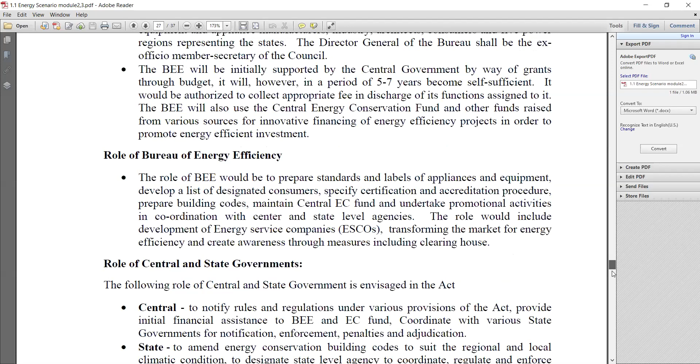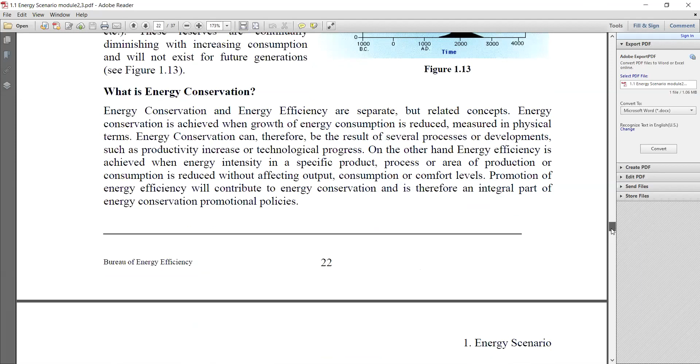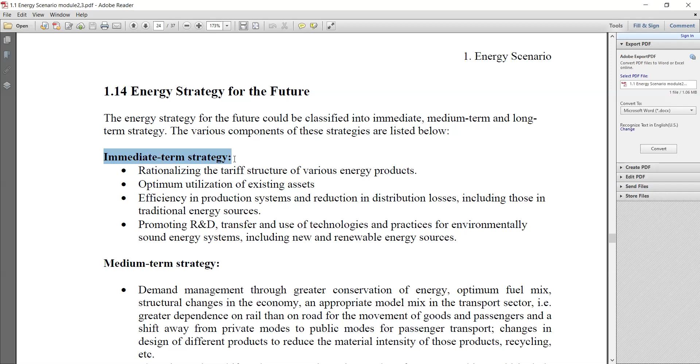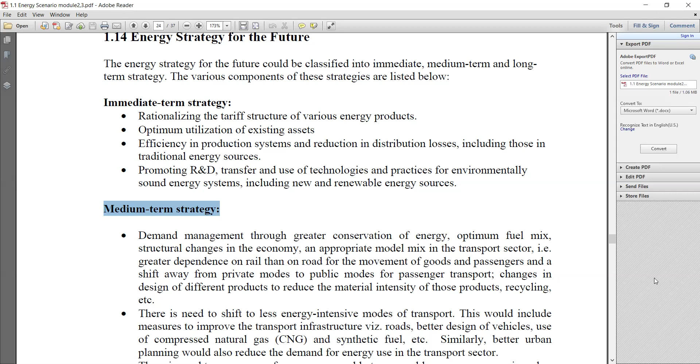In the last class we started with energy strategy for the future. We had looked at immediate term strategy - how quickly one can deal with the shortcomings in the tariff structure for energy and other aspects associated with it. What can be the immediate term effects and how can you go through them? Then we went on to medium term solutions - what can be the medium term strategy to handle energy for the future. Then the point left out was long term strategy - what should be the long-term strategy in terms of dealing with energy strategy for the future.

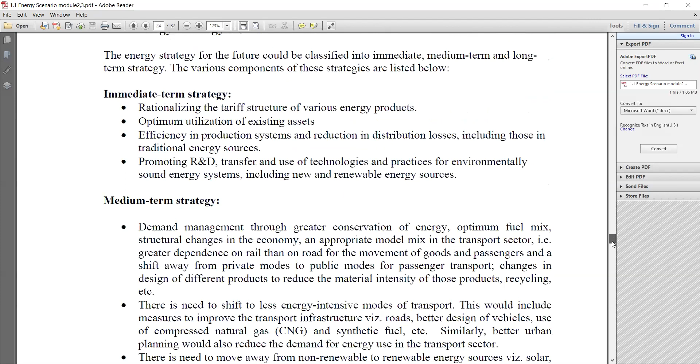So first is efficient generation of energy resources. Whatever energy resources are there, efficient generation of power should happen from them, that is, efficiency should be very high. Efficiency should be very high means whatever is the amount of input you're giving, equivalent amount of output you can get. That is, if 100% of input you're burning, and if you get 100% output power, that is the ideal efficient way of generation of energy resources.

But that is not feasible or practical in real life scenario. The strategy should be to maximize the efficiency as much as possible.

So for that, efficient production of coal, oil, and natural gas should take place. That means wherever quality coal, quality oil, quality natural gas is available, produce from there - extract it, refine it, then use it for energy generation, and the process should also be very much efficient.

These inputs - coal, oil, natural gas - should be used in such a way that the ash content, hydrocarbon content, sulfur content, nitrogen content should be eliminated, or available only in minimum quantity, though it is very difficult to get such kind of resources. So while utilizing these inputs, try to minimize the emission of hydrocarbons, volatile organic compounds, sulfur oxides, nitrogen oxides in order to produce energy generation. Then automatically your efficiency will be high, and your pollution will also be under very much control.

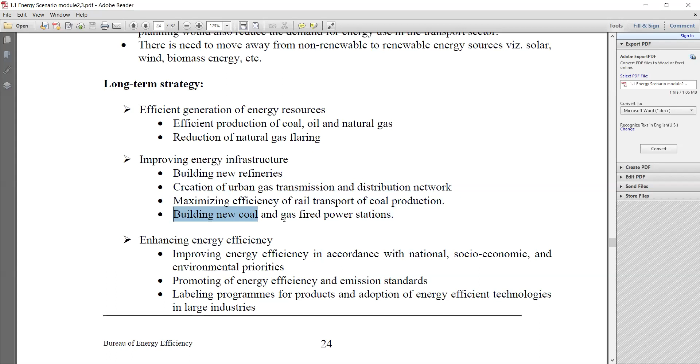Building new coal and gas fired power stations - trying to build up more and more power stations so that overall generation becomes higher. That has already taken place in India. Then enhancing energy efficiency - most of these things have already taken place.

Transportation cost is still there. It's pretty high, the transportation cost of coal from one place to another place. But there are many social, political, and international aspects associated with it. So it's easily said, but not easily done.

Then enhancing energy efficiency - again those same things, improving energy efficiency in accordance with national socio-economic and environmental priorities. That is, you've got to improve the efficiency of energy by taking into consideration your national aspect - what is the current national scenario, and what socio-economic things are associated with environmental priorities.

The same thing again - promoting energy efficiency and emission standards, that is creating more and more awareness among people about the importance of energy efficiency and reduction of emission of air pollutants.

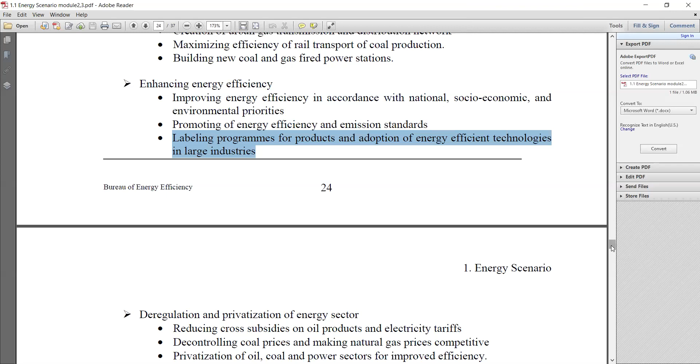So labeling means basically putting up any kind of tag on the device - tag means not price tag, but rating tag. For example, there is a 3-phase induction motor, so there is a nameplate rating always provided on it. So that is also labeling - you are putting a nameplate on the induction motor, and that nameplate carries the rating of the motor, so that will be easily visible. If you do not put any kind of labels on devices, then if any kind of maintenance, repair, or service is required, and there are several other devices, you won't have any idea about how to handle them.

So deregulation and privatization of the energy sector - this we have discussed already. Previously it used to be a one-man one-policy system, but later it got restructured and deregularized, that is, lots of privatized sectors were allowed to enter the market, and the business was spread out between them also. So number one, reducing cross subsidies on oil products and electricity tariffs.

So one has got to reduce cross subsidy on oil products and electricity tariffs. Otherwise, sufficient revenue from them won't be generated to aid the government, and as a result, expansion of the power sector will be affected. For that, money is required.

Decontrolling coal prices and making natural gas prices competitive - why should coal only dominate the market? There should be effective competition, so that there is always a choice, some sort of alternative available to people in terms of choosing energy resources. In that way, if the market becomes competitive, automatically at one point of time, to beat one product, the price of the other may come down, so that can be beneficial also, while at the same time one has to maintain quality.

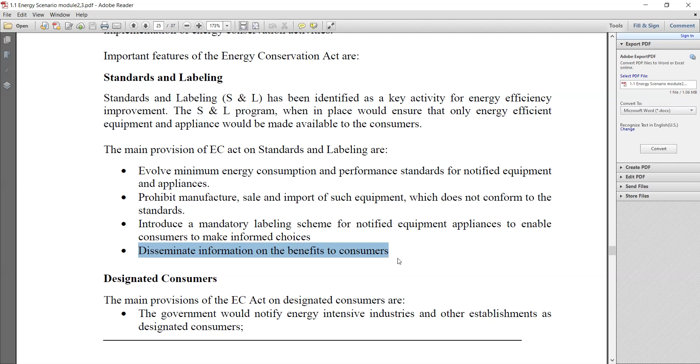Third is introduce a mandatory labeling scheme for notified equipment and appliances to enable consumers to make informed choices, so that it is practically visible to them and they can easily choose the required equipment and devices. The last point is disseminate information on the benefits to consumers, conveying information on the benefits of energy conservation to consumers.

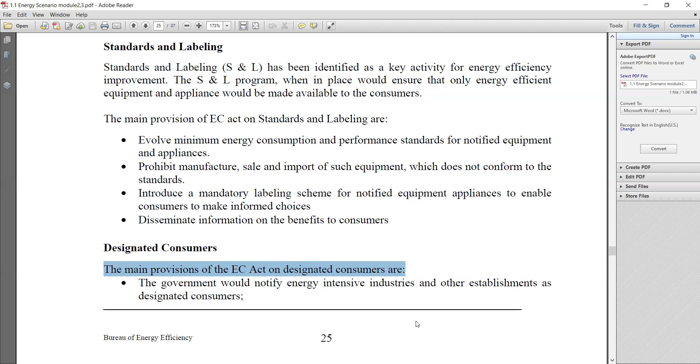The next point is designated consumers. The main provisions of the Energy Conservation Act on designated consumers are: number 1, the government would notify energy intensive industries and other establishments as designated consumers. So domestic consumers are exempted, while establishments such as offices, buildings, and intensive industries are the ones considered as designated consumers, where kVA and kilowatt hour both can be applied.

Domestic consumers are mainly charged on the basis of per day kilowatt hour, whereas designated consumers will be required to pay the electricity tariff based on kVA and kilowatt hour both.

Second, the schedule to the Act provides a list of designated consumers, which covers energy intensive industries, railways, port trust, transport sector, power stations, transmission and distribution companies, and commercial buildings or establishments. These are taken up as designated consumers.

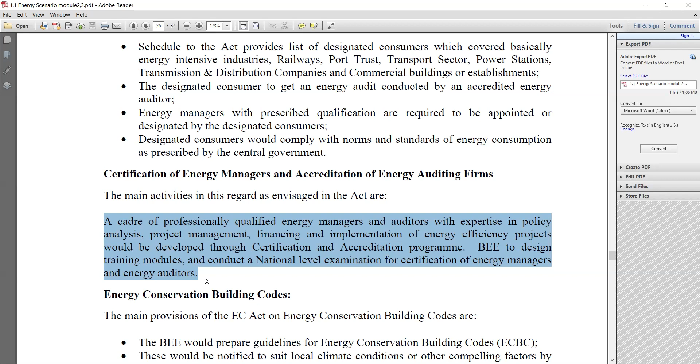There is the Bureau of Energy Efficiency, which designs training modules and conducts a national level examination for certification of energy managers and energy auditors. BEE is the organization which mainly teaches or gives out these training modules for upcoming energy managers and auditors, and they conduct a national level examination in order to certify energy managers and energy auditors.